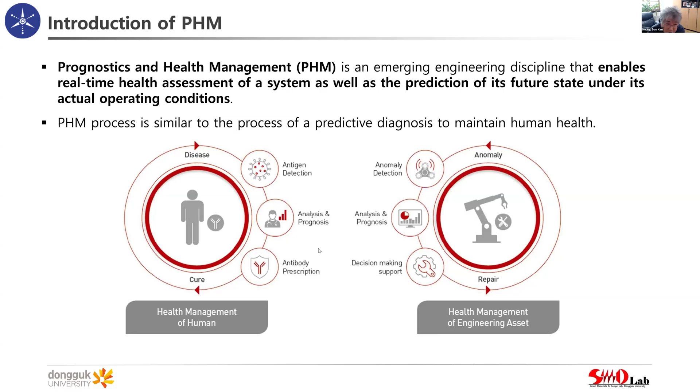As we move to the Industry 4.0 era, where machines operate autonomously and deliver services, we need to ask who will take care of these machines. That's where PHM comes in. We are experiencing a paradigm shift in operation and maintenance. From the old strategy, fail and fix, to the new approach, predict and prevent. Instead of waiting for breakdowns to happen, PHM allows us to stay one step ahead.

Over the years, maintenance strategies have gone through a major transformation. In the past, maintenance was mainly reactive. We waited for something to break down before fixing it. But now we are moving toward proactive and predictive approaches, thanks to technology like PHM.

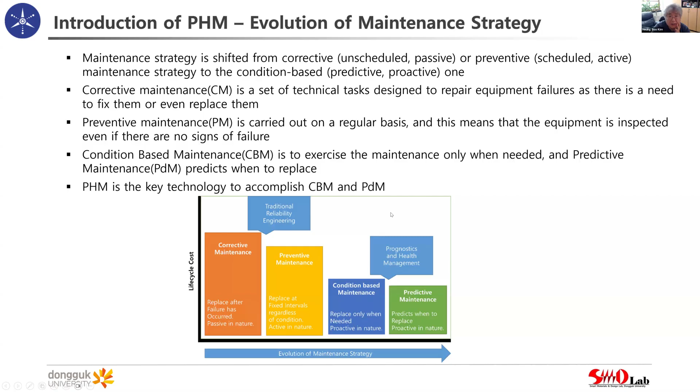To reduce maintenance costs while keeping reliability and safety, condition-based maintenance is a more popular approach. But to make CBM truly effective, we need prognostics, the ability to predict how and when failure will happen. If we can predict crack growth or degradation in advance, we can schedule the right maintenance at the right time.

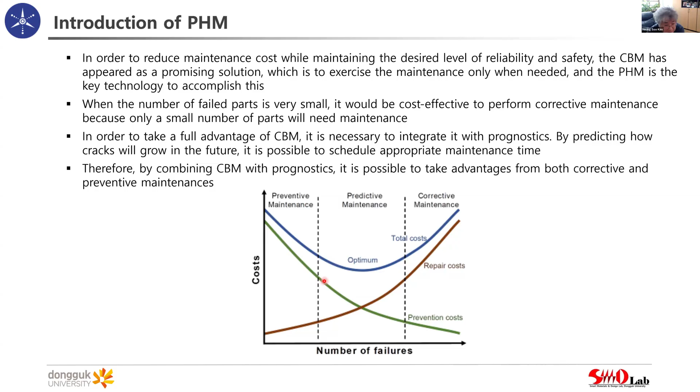Based on domain knowledge, there can be some threshold, and if the degradation level passes that specific threshold, it means end of life. The prediction of this end of life is usually based on statistics. Given the current stage of life and degradation level, if we can predict the end of life, then we can predict the remaining useful life based on probabilities. RUL prediction allows us smart decisions and fewer surprises.

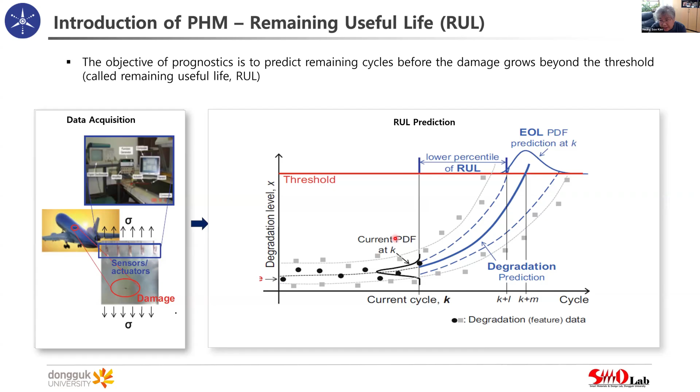One representative example of PHM applications is the F-35 fighter jet, which introduced the first concept of PHM. In the onboard systems, there are different types of systems: propulsion, structures, or mission systems. All of this sensor data is collected in the air vehicle PHM, and it goes to the health management reporting system, which can show the current health status of this fighter jet.

During the flight or after landing, all data are gathered in the central autonomic logistics system for PHM, and it provides troubleshooting of the fighter jet, as well as information for predictive maintenance and maintenance decision support. This enables fast, data-driven maintenance even before the jet lands. The F-35 shows how PHM can make a high-performance system smarter, safer, and more efficient.

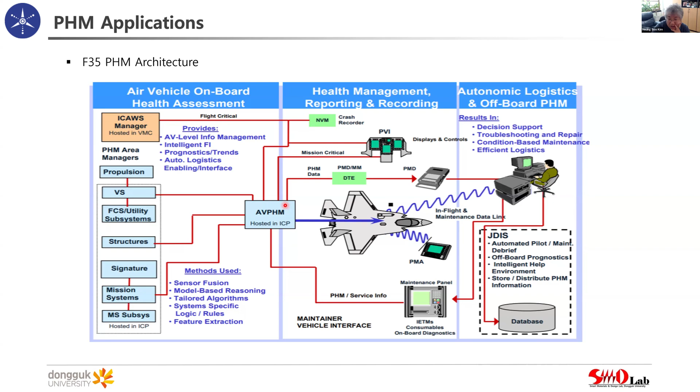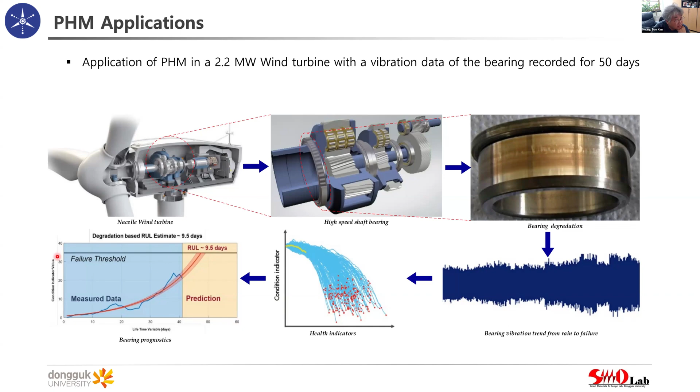Another application of PHM is this 2.2 megawatt wind turbine system. Vibration data can be collected from the wind turbine, and a health indicator can be developed by machine learning. Then the algorithm can provide the RUL. In this example case, the system can provide the RUL 10 days before the failure.

Another PHM application is this kind of turbofan engine. Four different engine cases were monitored here, fault indicators show the degradation trend, and the RUL was predicted for each case. This helps schedule maintenance before engine failure. The engine is a critical component of modern commercial aircraft, so PHM technologies are now inserted in turbine engine monitoring.

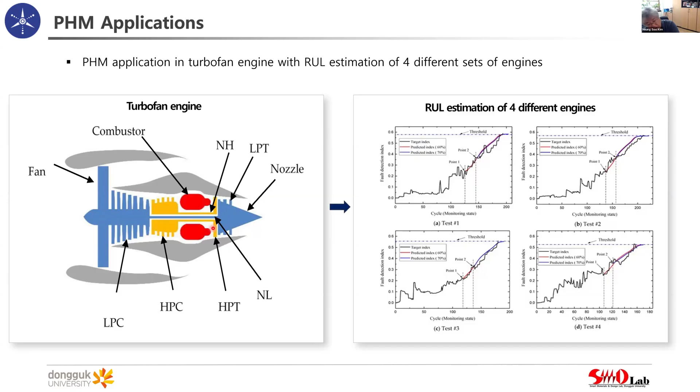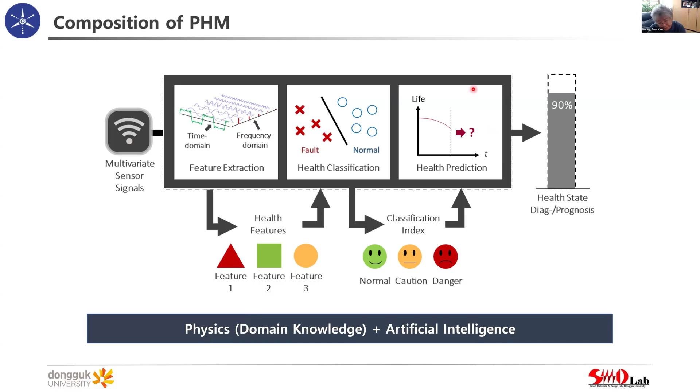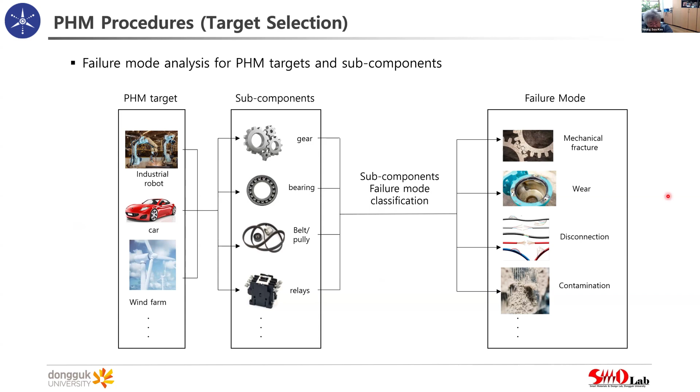This slide explains the target selection step by showing the full failure chain from system to failure mode. For example, for a car, there can be different subcomponents like gear, bearing, and so on. This bearing failure might involve mechanical fracture. The cause of failure might be overloading, and the result can be machine breakdown, quality degradation, or even worker injury.

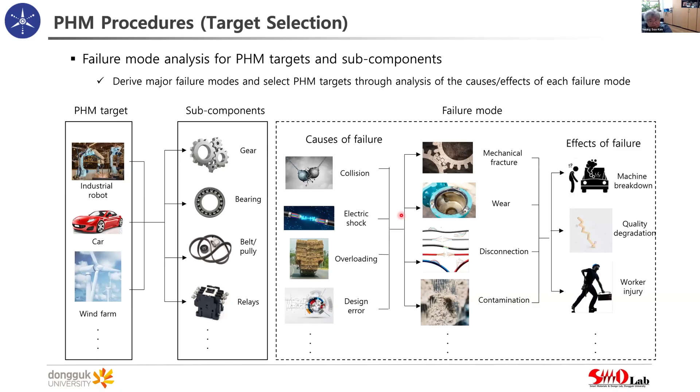Once you decide your targets, the second step is to decide how you can get the sensor data.

So next, which sensor do you need to use to detect the system? For example, for mechanical fracture or contamination, maybe we can use thermocouples, acoustic emission, or ultrasonic sensors. Each sensor has a different sampling rate, and different physical quantities.

A low sampling rate case means a small amount of data but over a long term. A high sampling rate case means a large amount of data in a short term. If you get your sensor data, you must do data pre-processing. Every sensor data has noise, so you need to denoise the sensor data. Also, you need to convert your sensor data to time domain, frequency domain, or time-frequency domain together.

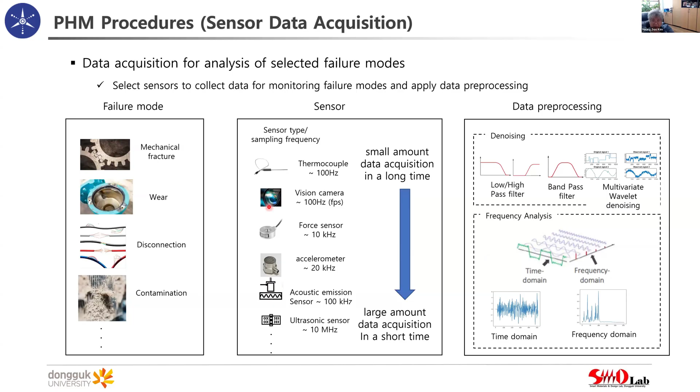Good sensor setup and clean data are critical for accurate PHM modeling.

Next one is feature extraction. Industrial sensor data often has very high resolution. For example, this kind of vibration sensor has a 6.4 kilohertz sampling rate. For 5 sensors, if you measure for 60 seconds, just one measuring case provides you almost 2 million dimensions of data points.

If the raw data is too large and noisy, then it cannot provide accurate prediction or accurate modeling for PHM. So what we need to do is feature extraction. Feature extraction usually means converting the waveform into meaningful values like RMS, kurtosis, or frequency band, something like that. After that, we need to choose what kind of feature is useful for our PHM modeling.

Also, the size of data is too big, so we need to do some dimensional reduction, which simplifies data without losing critical information. These steps boost learning speed and improve PHM model accuracy. If you have good features, then you will get better predictions with less computation.

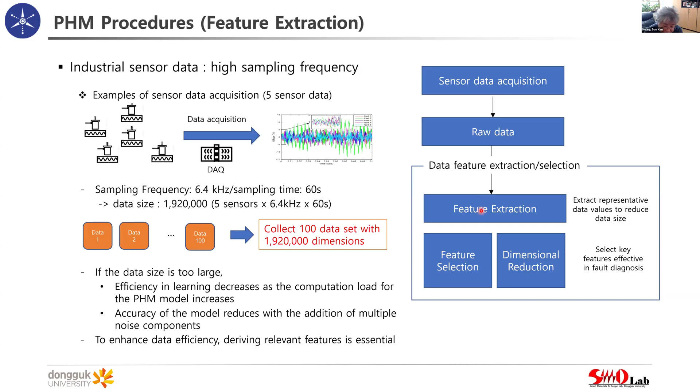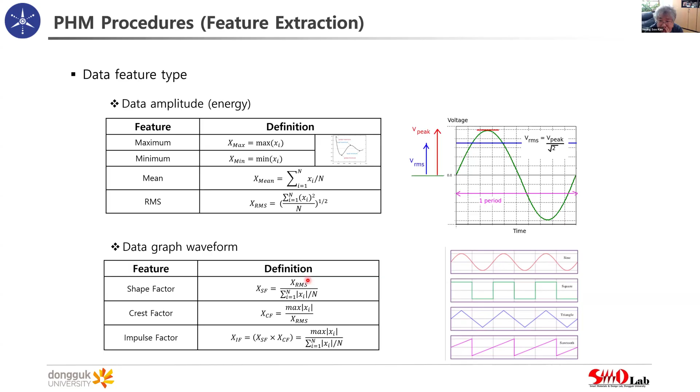This is a common data type: energy-based or waveform. For the energy-based case, usually maximum, minimum, mean value, RMS, something like that. For example, RMS provides you the average energy over time. For waveform, shape factor, crest factor, impulse factor provide you the shape of the data. Choosing the right feature type is critical for distinguishing healthy and faulty stages accurately.

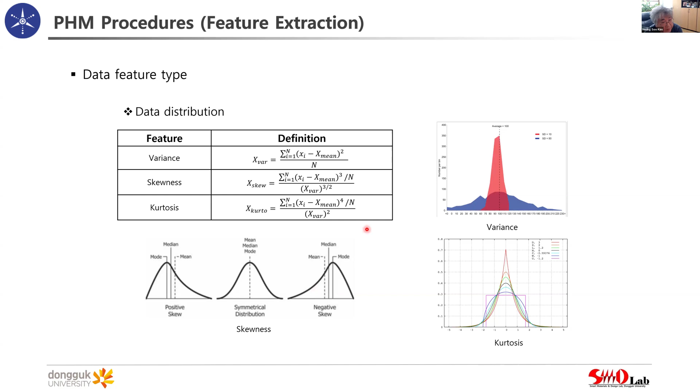If you reduce the redundancy, then you can improve the learning efficiency and model performance. So in PHM, less can be more, if you reduce dimensions wisely.

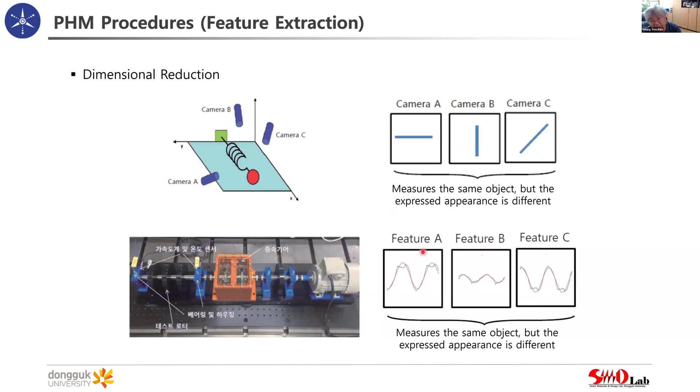The most common dimensional reduction method is principal component analysis, called PCA. PCA finds a new axis based on the distribution of sensor data. This new axis is called the principal component, so it's called principal component analysis.

It transforms the data from the original axes—here maybe A, B, C—to the principal components ranked by importance. In this example, I have A, B, C, three features, but if I use the first principal component, then I can use just that first principal component data only. PCA reduces noise, compresses data, and helps improve the model performance in PHM.

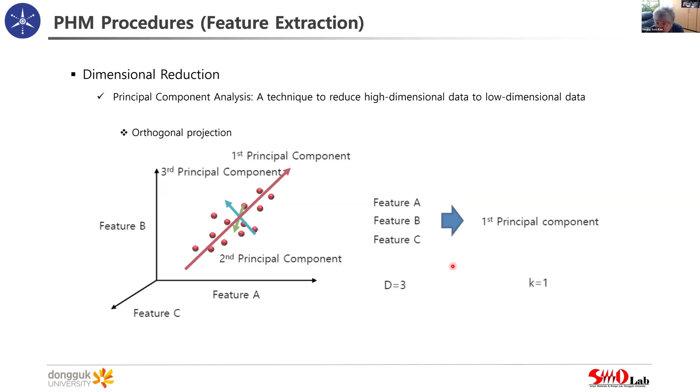PCA not only reduces dimensions, it also helps the visualization of data, compression, and anomaly detection.

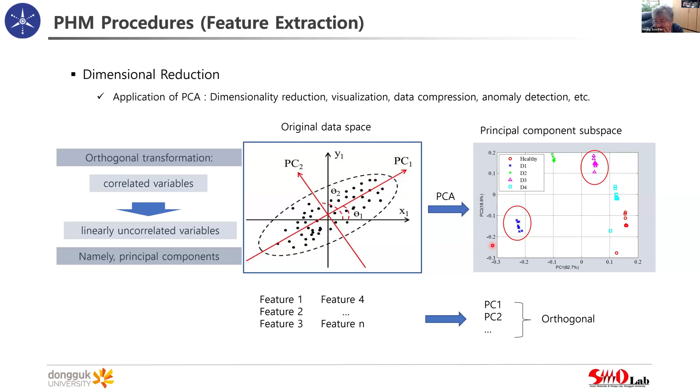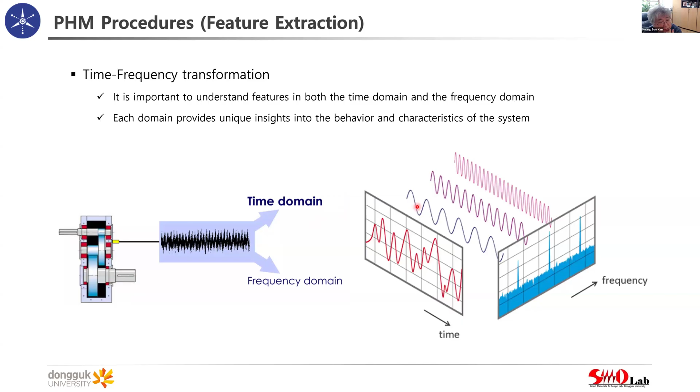Next key feature extraction methodology: time-frequency transformation. Usually the sensor data is time domain data, but the time domain data is not enough to provide us information about damage. If you can convert it to the frequency domain, sometimes it's helpful, or if you use time and frequency domain simultaneously, sometimes it's better. So we need to transform this kind of data to frequency domain or time-frequency domain.

The most common popular method to convert time domain data to frequency domain is short-time fast Fourier transform, STFT. If you have time domain data, you make small windows, and if you do Fourier transform, then you get time and frequency domain simultaneously.

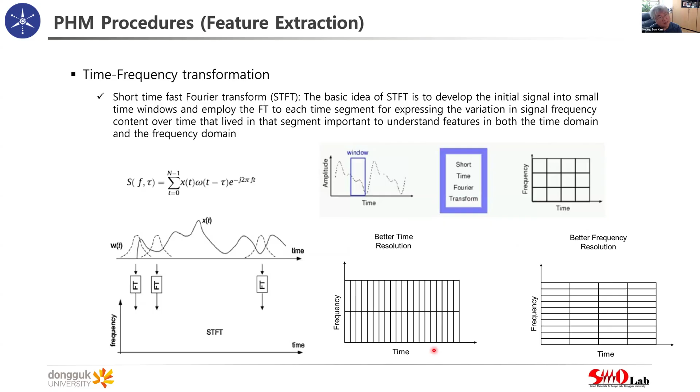It's called short time Fourier transform, fast Fourier transform. This is an example of STFT, time domain data converting to frequency domain by Fourier transform, or you make small windows and also make time domain and frequency domain together simultaneously.

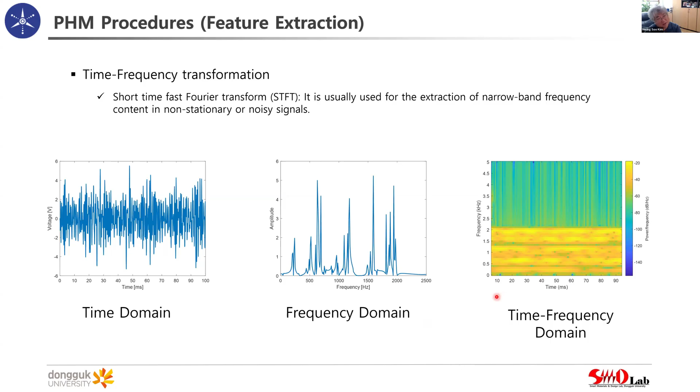Another way to present the time frequency domain is called continuous wavelet analysis, CWT. CWT provides different windows. For high frequency data you can use a small window, and for long-term low frequency data you can use a big window. So with CWT you can use flexible window sizes, giving more fine-grained insight for complex signal behavior.

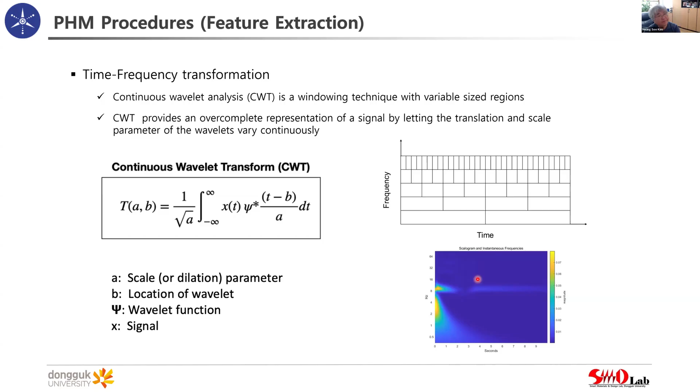So finally, AI-based PHM modeling. For PHM modeling, we need to use AI. So let's briefly see what AI and machine learning are. Most of you know this already, so just a brief summary.

AI, artificial intelligence, is the broadest term. It's a system that acts like an intelligent agent. Inside AI there is a subdomain called machine learning, which is a system that learns from data to make decisions. Inside machine learning there is deep learning, a further subset that usually uses a neural network to automatically learn features from raw data.

In PHM, the difference between machine learning and deep learning is that machine learning requires manual feature extraction, but deep learning does not. The deep learning algorithm itself does the feature extraction and classification. Deep learning takes much longer than machine learning, but thanks to modern GPUs, deep learning has become practical and powerful for real PHM systems.

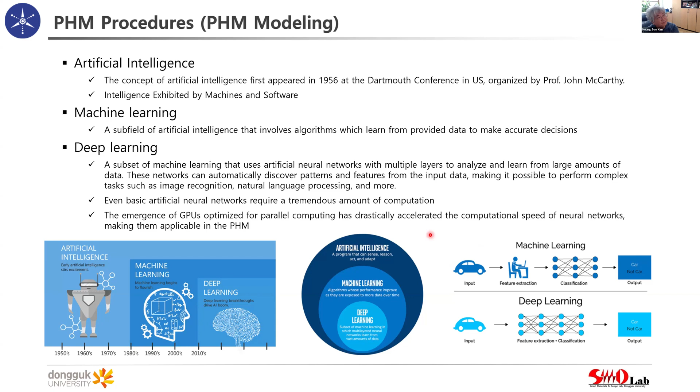Another common and simple machine learning algorithm is KNN. KNN is a very simple method: it checks which data point is closest to a new one, and if that closest point is faulty, the new point is also said to be faulty. To determine closeness, KNN uses distance — there are maybe three different types of distance measurement: Euclidean, Manhattan, or Minkowski. KNN is very easy and works well for basic classification in PHM.

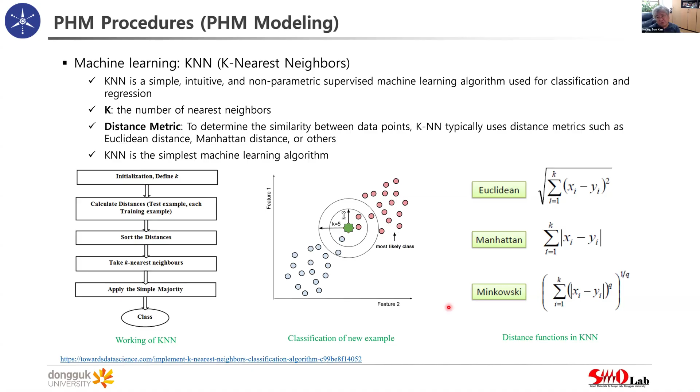Another popular method for PHM modeling is CNN. CNN is a deep learning method — it automatically finds important features with no need for manual extraction. It has convolution layers and pooling layers repeated, followed by fully connected and softmax layers. A convolution layer detects patterns in the image, and the pooling layer makes it faster by making it smaller. The fully connected layer leads to the final decision. In PHM, CNN can be used for image-based diagnosis or vibration spectrograms, and since CNN learns features by itself, it saves a lot of work.

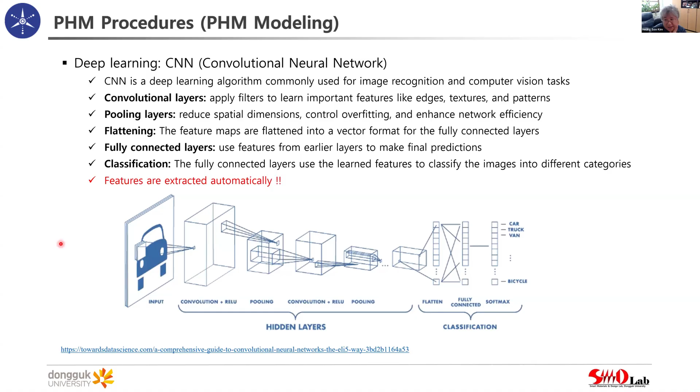Another deep learning method is the autoencoder, which is usually used for denoising, anomaly detection, dimensional reduction, and so on.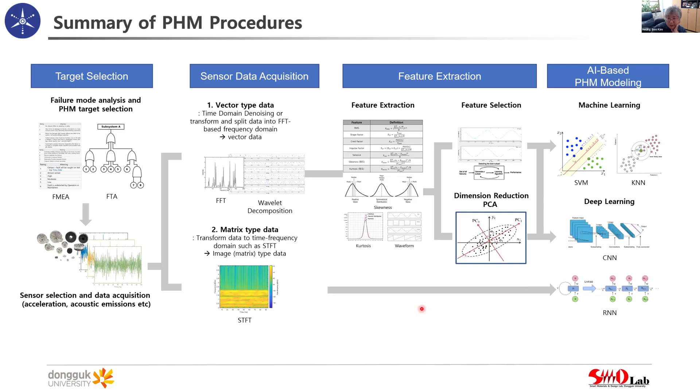The summary of the full PHM process goes from target selection to AI-based PHM modeling. Target selection is choosing the system and failure mode. Sensing and data acquisition collects time- or frequency-based data. Feature extraction extracts useful patterns and reduces time domain data. PHM modeling uses machine learning or deep learning to predict faults. Each step is important to build a smarter and more reliable PHM system.

So this is a brief introduction to the PHM procedure. Now let's move on to the next part, PHM for composite structures. We will look at how health monitoring techniques are applied specifically to composite materials.

Laminated composites are made by combining fibers and resins. This gives them high strength and flexibility in design, and they are used in many fields. This is the Boeing 787, a very famous figure, and more than 50% of this aircraft's structure is now made from composites. Ships, cars, and other structures also use composites. Each layer of a laminated composite can be tailored to meet specific mechanical needs, like bending strength, impact resistance, and so on.

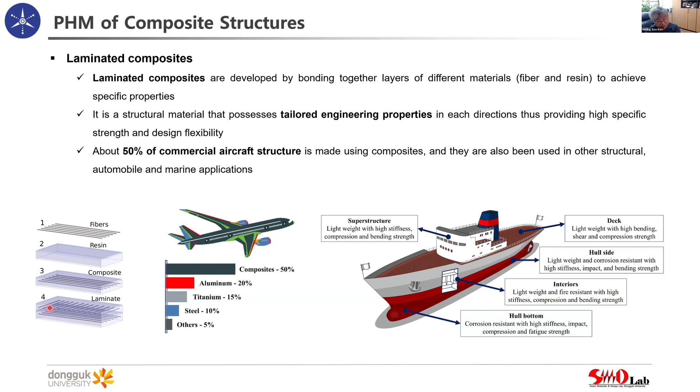This laminated composite has orthotropic characteristics. Because of this, its failure mode is very complicated. The most common failure modes are fiber breakage, matrix crack, or delamination. Among these, delamination is the most critical. It weakens the structure and may lead to catastrophic failure. To extend the life of a composite structure, it's important to detect this kind of delamination at an early stage.

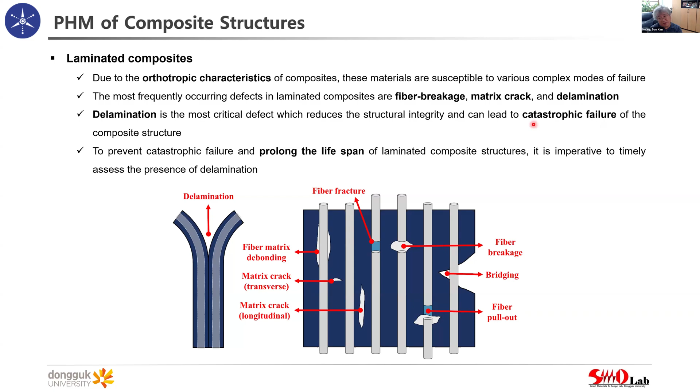To detect the damage of a composite structure, there are two main approaches. The first one is the physics-based approach, and the second one is the data-driven approach. The physics-based approach uses formulas and material models like constitutive equations or fracture mechanics. It explains why the damage happens.

Data-driven approaches use sensor data and machine learning or deep learning to detect patterns and predict failures. It works well with vibration or acoustic signals. We often combine both to get accurate and reliable health monitoring.

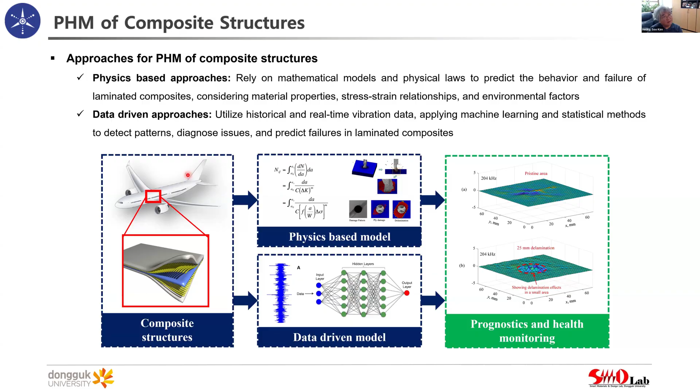Okay. This is what I did during my PhD work. I analyzed how delamination affects the vibration behavior of composite plates. Experimentally, I measured the vibration modes of the composites and also developed a numerical model to describe the vibration effect of the composite structures. This was published around 2003, my PhD work. Based on these models, I developed the modal strain damage index and so on.

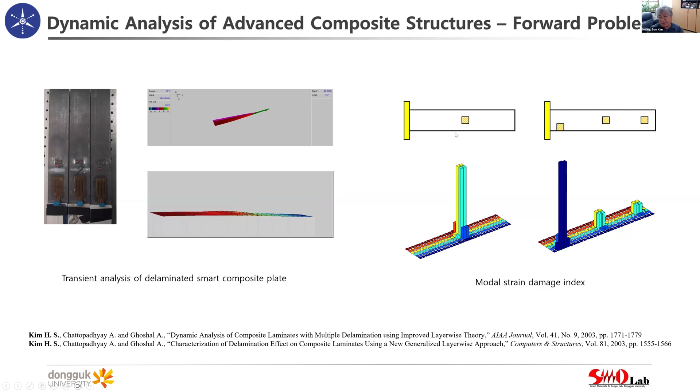This is a forward problem, meaning I know where the damage is, and based on the damage, I developed a numerical model to explain the damage effect. This result can help us to solve the inverse problem, meaning detect damage from the structural response.

Around 2014, 10 years after my PhD work, I did this kind of work. Based on my numerical model, I applied random excitation to the system, got the random responses, and did some system ID to construct the system matrix, input matrix, and sensor outputs. Using the system matrix and input matrix, I made discriminative features and applied them to PCA, which I explained to you before.

And I plotted here two principal components. There are five different types of data. In time domain data, it's very hard to classify each class. But if I use this kind of discriminative features, I can separate the different classes. This was reported in Computers and Structures. This means in the time domain it's not easy to distinguish the sensor signals, but if you choose proper features, we can classify the data. That's the meaning of this work.

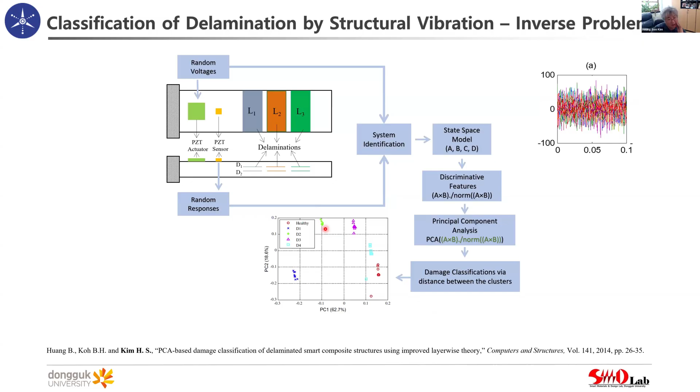After this work, in 2016, there was AlphaGo. AlphaGo defeated a champion in Go, right? After that, AI became very popular in every engineering discipline. At that time, I also studied machine learning, thinking it might be possible to apply it to my field.

So we used a support vector machine, and the support vectors can provide us the domains of different classes. We reported this in Composite Structures, the top journal of composites, right? Dr. Asif Khan did this during his PhD work.

Based on those studies, we found that structural vibration contains global structural information, right? But the damage is local structural information. So from just time domain data, it's not easy to extract local information from this kind of global information. But our previous work showed that if we choose proper discriminative features, it's possible to extract local information.

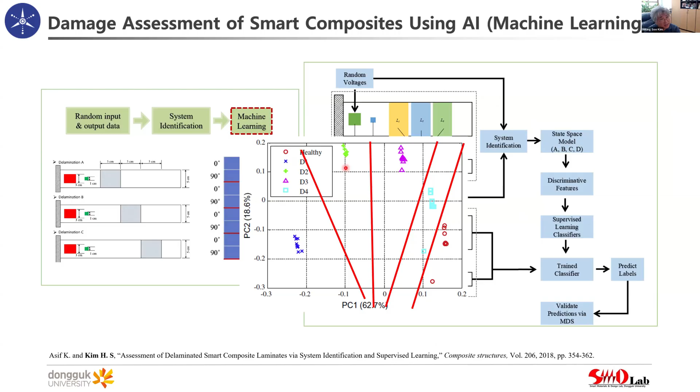But in this case, we need the input data and output data simultaneously. In real applications, it's very hard to get input data. So the question is, is it possible to classify these kinds of damage using sensor data only? The answer is yes. So we used a CNN here.

We converted the time domain data using the short-time Fourier transform into image data, a 2D array. Using this image data, we used the CNN to classify the damages. And it works. It was published in Composites Part B, a top journal, in 2019. It has been cited more than 200 times, one of the most highly cited papers in my life. Dr. Asif Khan also did this work.

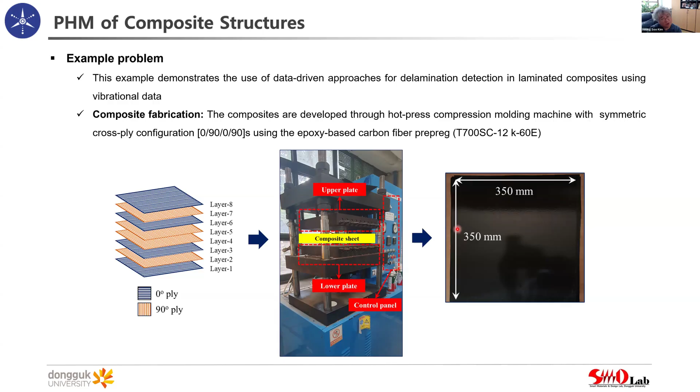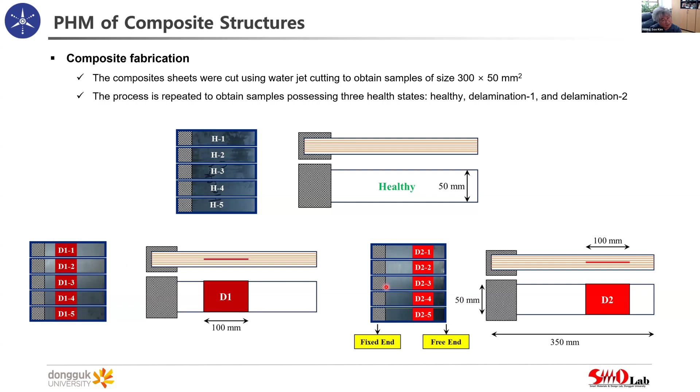After this work, I realized damage detection based on structural vibration is possible. So we tried to demonstrate this by experiments. We made composite coupons using a hot press. The composite plate was cut to 300 by 50 by water jet, we prepared five coupons for each case, and we prepared the vibration test system.

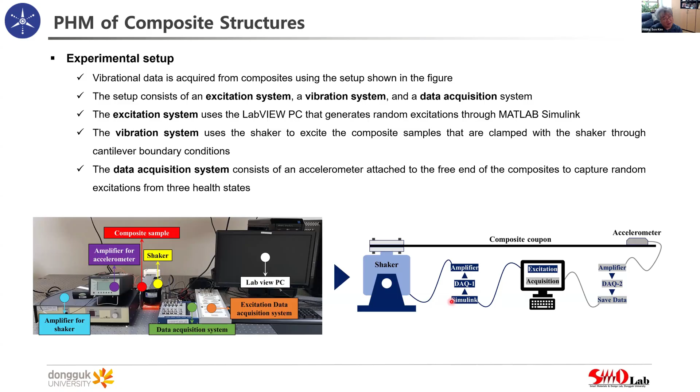It contains an excitation system, the vibration system, and the data acquisition system. For the excitation system, we use LabVIEW, which provides the random signals. The shaker provides the vibration excitation of the composite coupons, and the accelerometer gathers the data. Based on this experiment, we prepared the vibration data for the PHM modeling.

So in each case, we had 3 different health states: D1, D2, and the healthy case. For each health state, we prepared 5 samples, so overall we have 15 cases. For each case, we did 10 tests, so we had 150 signals like this.

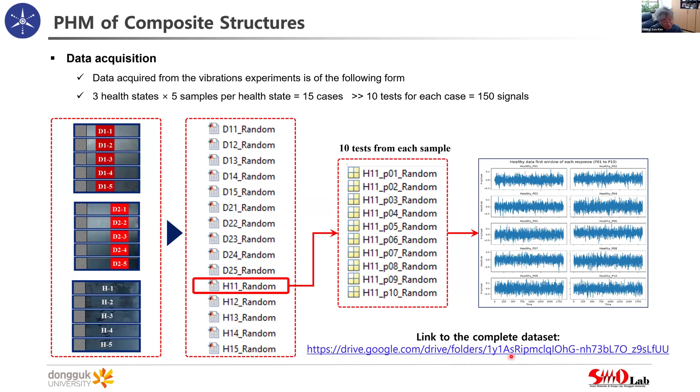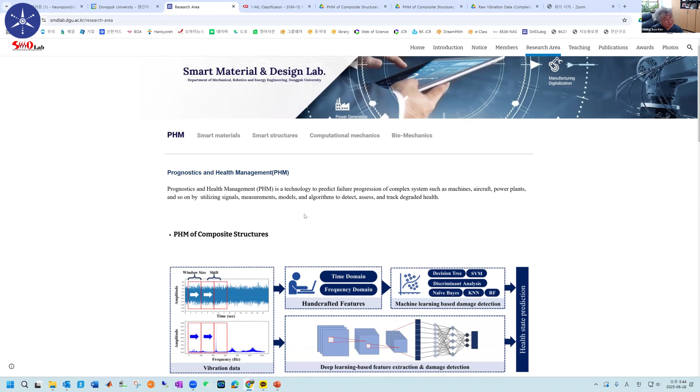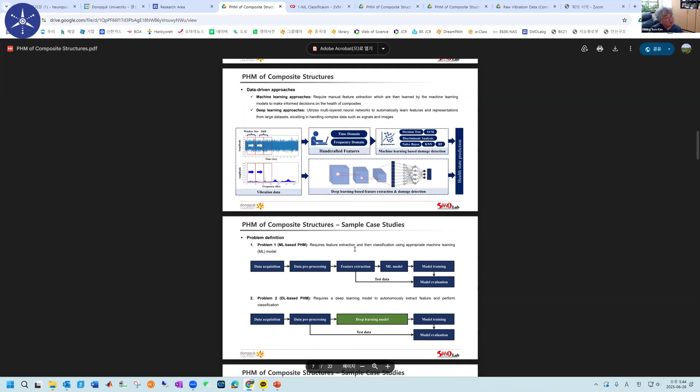The whole data set is posted on our homepage, so you can access it at this link. But maybe you cannot access this PPT, right? So I prepared this: this is our homepage, Smart Materials and Design Lab. I have several different research areas, and PHM is now my major research area. On this PHM page, I have PHM of composite structures, and I prepared the complete data set here, some training code for support vector machine and CNN, and also PPT slides explaining this code. So if you are interested, visit our homepage, and you can try to run the code.

Anyway, based on these preparations, we developed some damage assessment methods using AI. But one realistic issue is that for training, we need balanced data. That means if I have 3 different classes, healthy, D1, D2, then I must have balanced data. But in real cases, most data is the healthy case, and there is no damage data available. This kind of case is called data imbalance. Data imbalance can cause poor accuracy and poor predictive modeling. So what we need is to make balanced data, and here we used data augmentation techniques.

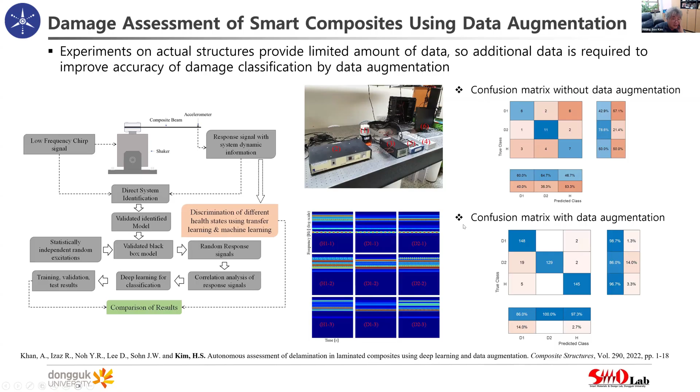Dr. Asif did this one, and he used our previous numerical model for data augmentation. Without data augmentation, the prediction accuracy is very low. With data augmentation, prediction accuracy increased a lot, which means data balance for training is very important. That's what we discovered around 2021, 2022. At this time, Dr. Khan graduated, got his PhD, and moved from our lab. Another PhD student, Muzamil, who is now a research professor in our lab, took over Dr. Khan's work, and we developed other PHM models.

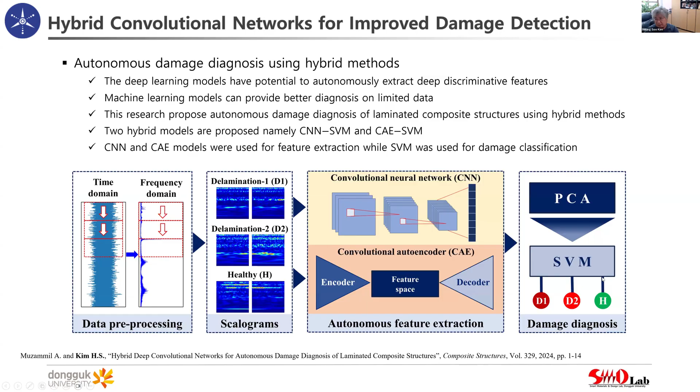We tried several methodologies. The first one is a hybrid model to improve the PHM accuracy of the prediction of composite damage. Here we developed a combination of CNN and SVM, or CAE plus SVM. CNN or CAE is used to extract the features automatically, and SVM is used for damage classification. This kind of hybrid method lets us use both the strengths of deep learning and traditional classifier algorithms.

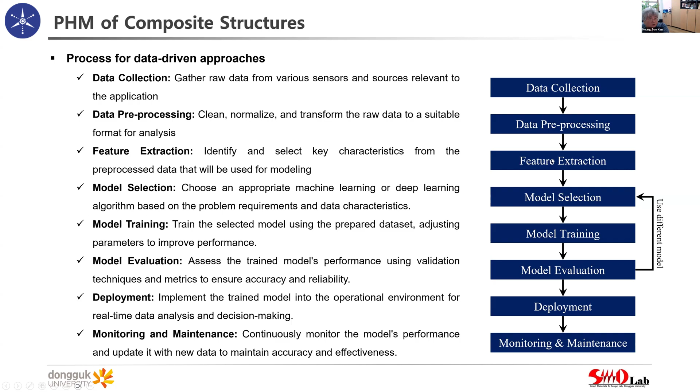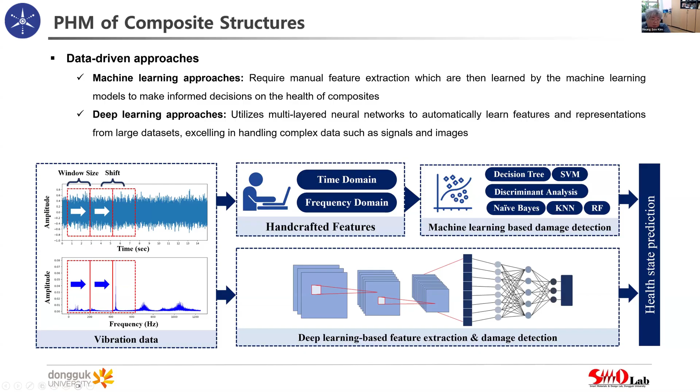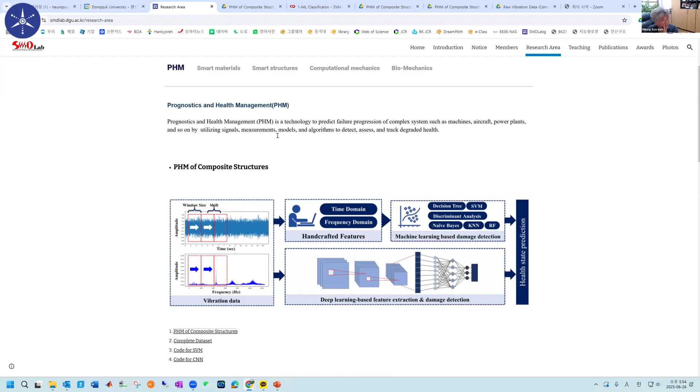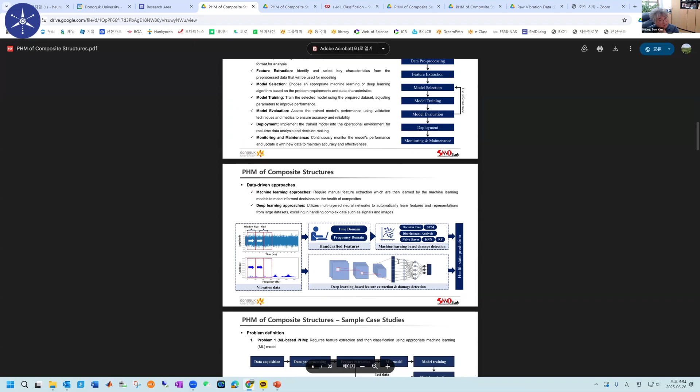So this is what I provide for you to understand the PHM of composite structures. I prepared two examples of our PHM of composite structures. The first one is a machine learning approach, and the second one is a deep learning approach. Because of the time limit, I'll just quickly show you how you can access them. As I told you, on our lab homepage you can find this page on composite structures, and you can download the slides for these two codes, and there is an explanation of the code. This is just what I showed you, right? And from here, it shows how to use the source code.

So we have this time domain data. The complete data set is provided here, right? And I provide two PHM codes here. One is a support vector machine, and the other one is a CNN. If you click here, it's not moving well, it takes time. Okay, if you click here, it's a Python code, but it can run on Google Colab. So you can see all the source code, and if you run the source code, you will figure out how the PHM of a composite structure works. Okay.

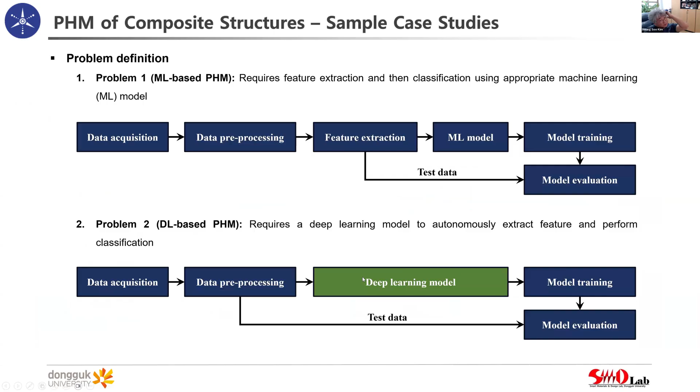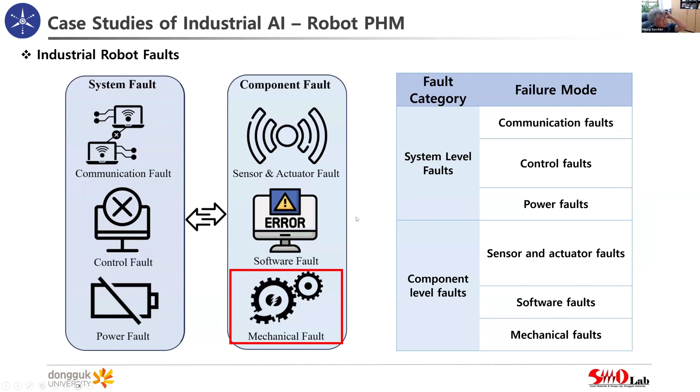Because of the time limit, I cannot explain all the things. Maybe I can move to the next. I prepared some other case studies based on industrial AI-based PHM. Our lab is also doing PHM of industrial robots, and we did a project on damage detection of the industrial robot.

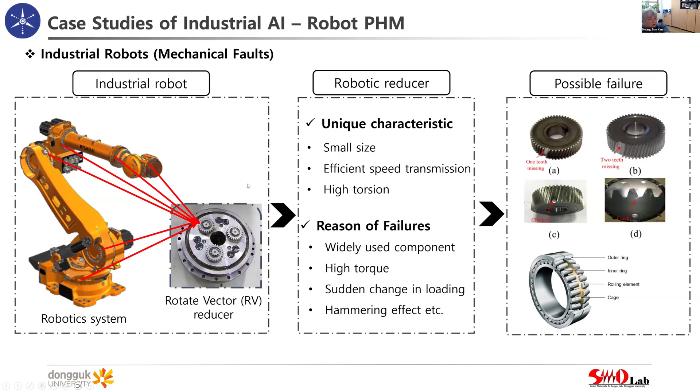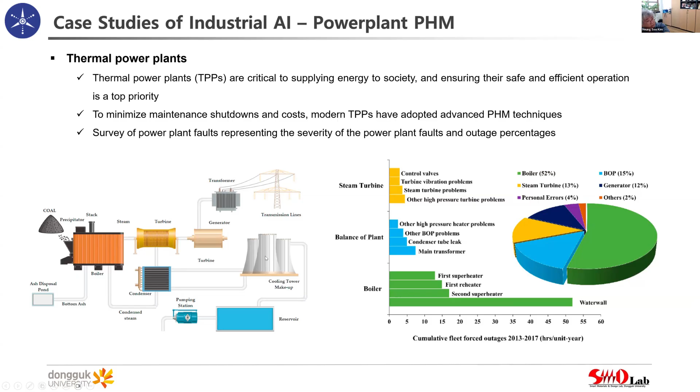And the other one is power plant PHM. We also collaborated with Korea Electronics, and we tried to detect leaks in the pipeline of this 500 megawatt power plant. I'll just omit the details, and if you are interested, maybe I can share our papers.

So because of time limit, I'll just conclude my presentation. PHM is a transformative approach enabling real-time health assessment and predictive maintenance of complex systems, particularly in composite structures and energy applications. Data-driven methodologies, including machine learning and deep learning, have demonstrated significant potential in detecting and classifying structural damage, even under data-scarce and noisy conditions.

Hybrid AI models, like CNN-SVM or CAE-SVM, and explainable AI techniques improve interpretability and performance in real-world diagnostics. Robotics, maybe we just omit. We are currently advancing our research on industrial AI applications through ongoing collaborations with Hyundai Robotics for anomaly detection, and also trying to detect the RUL for lithium-ion batteries in mobility applications.

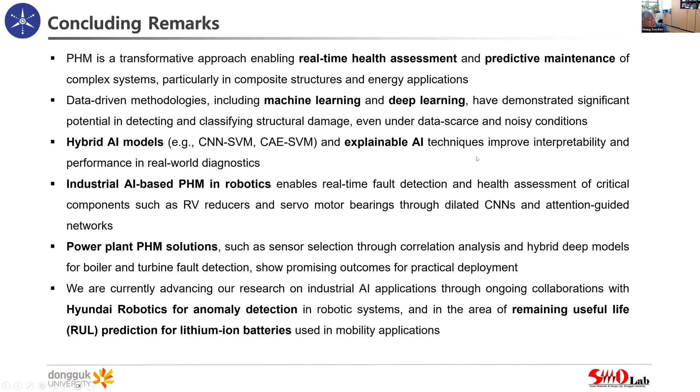Right now, for a very simple bearing, a simple mechanical component case, it's possible to predict RUL. But for this kind of composite structure, there is no paper available for RUL prediction. What we want to do is combine physics-informed neural networks and XAI to predict RUL. So this started this year, a 5-year project, and hopefully after 5 years I want to develop some methodology to predict RUL of composites.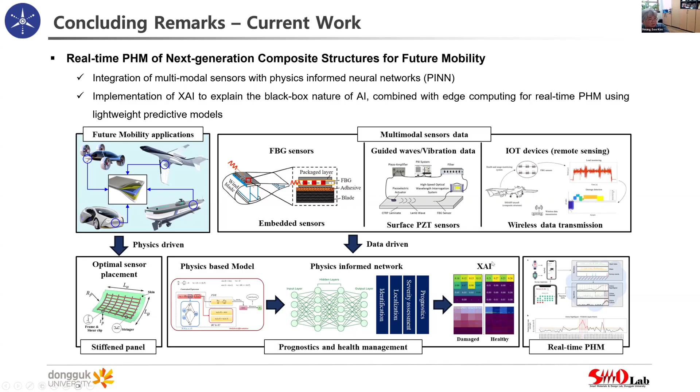The second one is the anomaly detection of robots. And the third one is RUL prediction of mobility batteries. The battery case is much easier than composite structures to predict RUL. So this is what we are now trying to do, predict RUL of batteries.

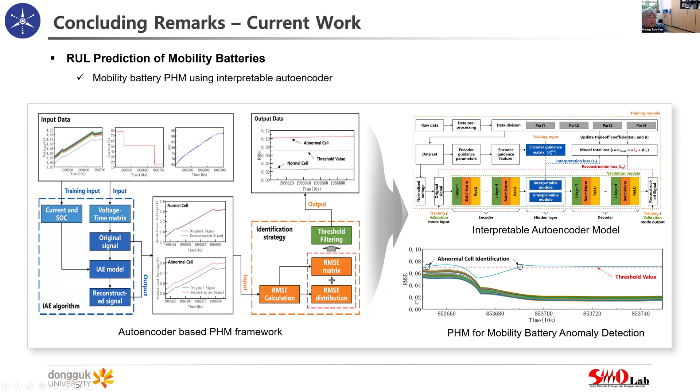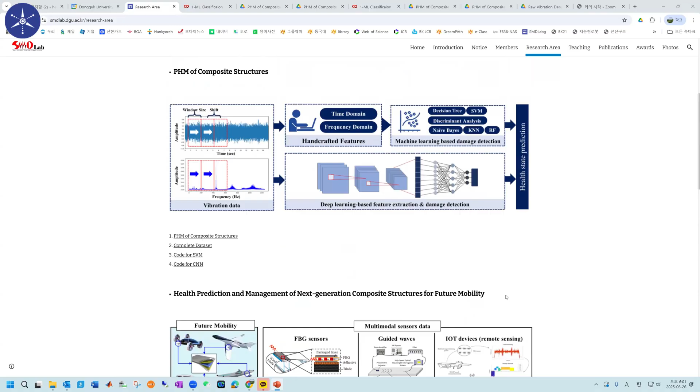So I'm just wondering, is it possible for the well-trained model to be applied for detecting delamination in more complex structures, or is this model only applicable for a specific case, for example, the same structure as the one you are using for generating the data set?

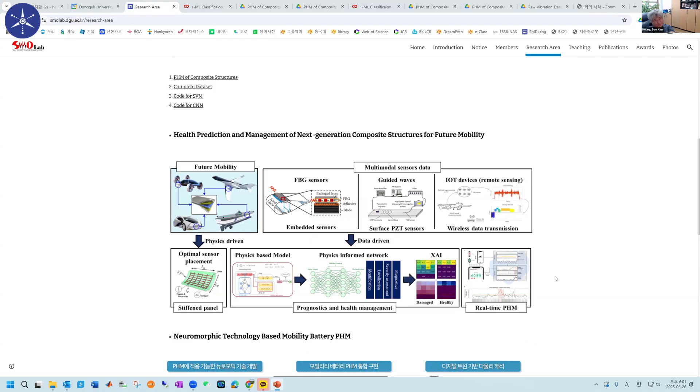Thank you very much. That's a very nice question and a critical question, right? The thing is, a machine learning or deep learning model's accuracy or performance is based on the data set, as you know, right? So our previous work is basic research paperwork. The importance of that work is, as I told you, from the global structural response we can extract local information, damage information. That's what we found and reported to the world, right?

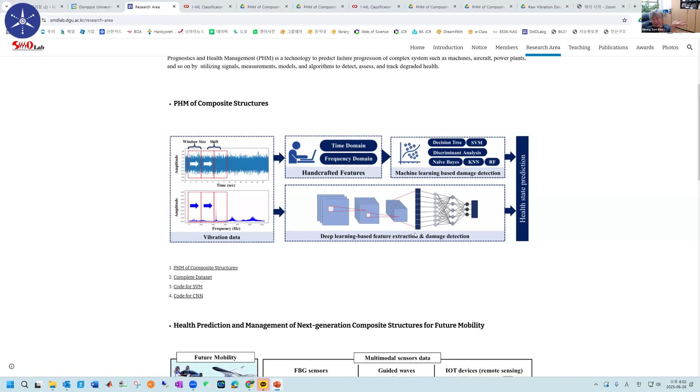Using papers. And those are only applicable for very simple structures now, because I have only the data for the cantilever structure. So that's the reason I want to provide other things, a physics model, something like that. If we have more data for complicated structures, of course, I think right now the power of AI is good enough. So if we have enough information, definitely we can detect damage in complicated structures. But the issue is we don't have that kind of data yet.

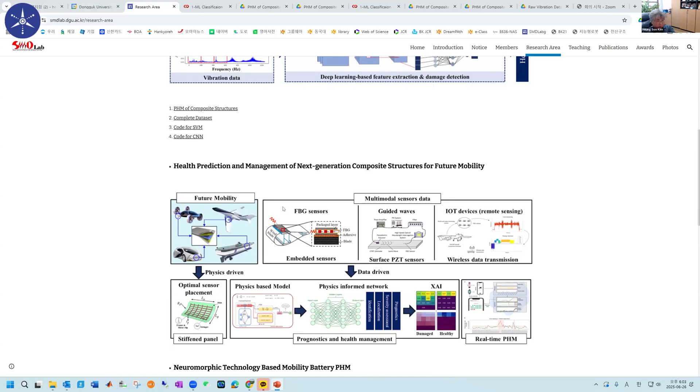So if you have a good data set for AI training, based on my experience, I can say I had several experiences, not only for damage detection in composite structures, but for lithium-ion batteries and some robot systems.

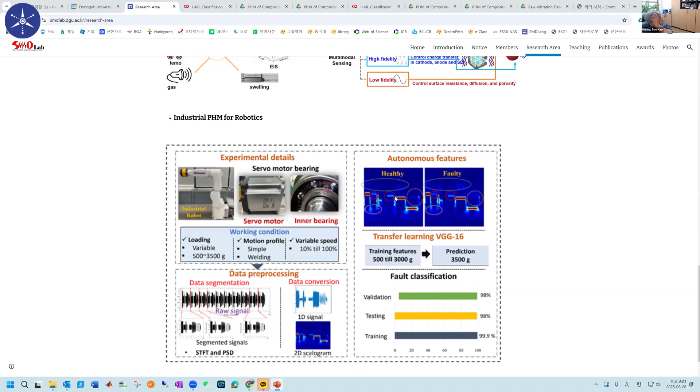If we have enough data, then definitely the AI model can detect the damage information. So the issue here is, do you have enough good data or not? That's the issue. If you have good data for a complicated structure, definitely you can develop a good model and you can predict damages. But if you do not have good data, it's not possible.

Okay, yeah, that's fair enough. Thank you, Professor Kim. Really nice talk. Thank you.

So another good thing is, that's the reason this field needs people like us, right? Engineers, because this problem is an inverse problem, right? Figuring out the damages from the sensor outputs is really not easy. I didn't present it today; today's presentation just has the classification of damage only.

But recently what I'm doing with my student is localization of damage. Using the sensor outputs, we want to figure out where the damage is located. That's usually what structural health monitoring people did, right? But in previous structural health monitoring cases, localization of damage was possible only for a very narrow zone, and we want to detect damage in a very large structure, like this aircraft wing.

It's a very big one. In a small area, it's possible to localize damage using Lamb waves, guided waves, something like that. But it's not applicable to a big structure. So that's the question, and we want to try to develop some methodologies to localize damage. That's another level of problem.

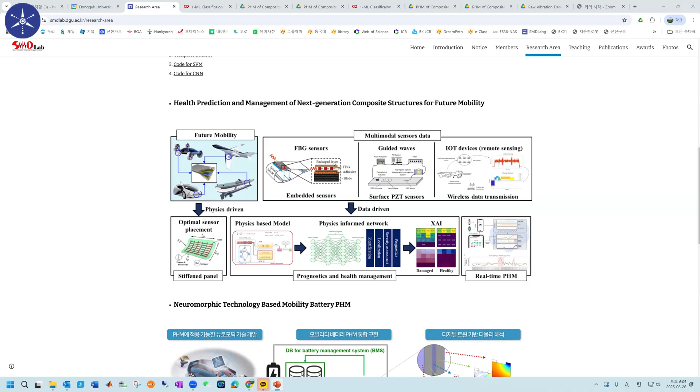So firstly, we want to classify if there's damage or not, then we'll definitely move forward to get a more accurate prediction for the severity and location of the damage, and more importantly, for much larger or complex structures. It will be more challenging, but I agree with Professor that there's still a long way to go for this.

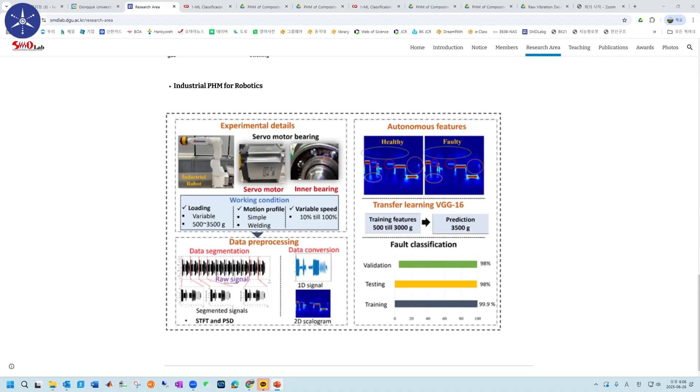Thank you. One thing is, I heard from Asif that now you want to study damage detection of a composite pipeline, something like that. This is one example of my work: I collaborate with Hyundai Robotics. They make many types of robots, and their robots are in Hyundai automobile smart factories. There are 100 robots inside the smart factories, and if one of the robots stops, then the overall process just stops, and a huge downtime cost occurs.

So now they want to develop a PHM model like what we are talking about, right? But even this big company doesn't have a PHM algorithm itself. The key of PHM is predicting RUL, but that's the last stage. Hyundai Robotics wants to develop an anomaly detection methodology now. In the overall procedure, the first step is anomaly detection. After that, diagnosis of the system: where is the fault? After that, maybe we can predict the remaining useful life. So this major company still cannot develop the anomaly detection methodology.

I showed you the example of PHM, right? Turbofan engine. The gas turbine engine is a very important component in aircraft, and GE or Pratt and Whitney, the gas turbine engine makers, developed PHM technology and apply it to gas turbine engines only. Commercial airlines are just using the PHM solutions provided by the maker, GE or something. But GE asks too high a cost; it's too expensive. So the commercial airlines want to develop their own PHM algorithms. That's what we are doing now. And right now, there are lots of demands from industries for this kind of PHM methodology.

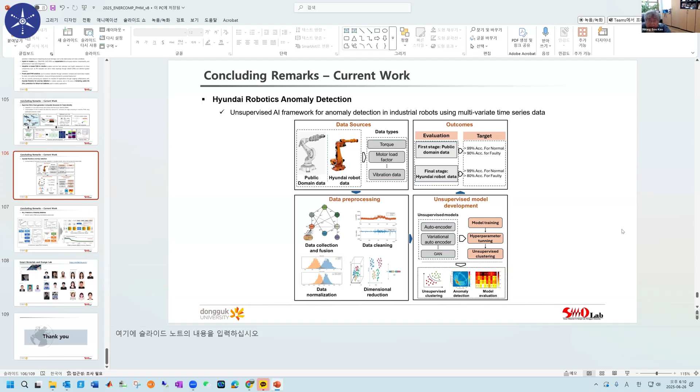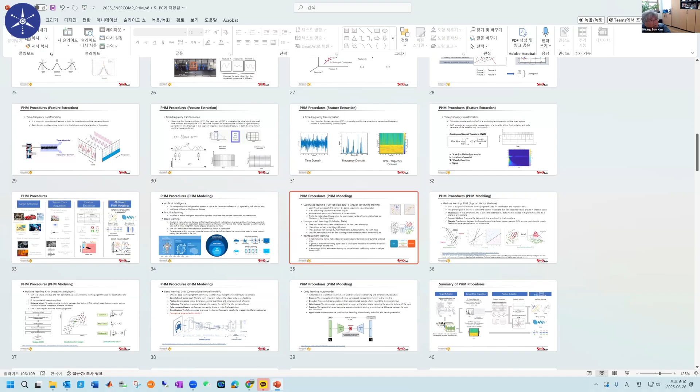Maybe you must have labeled data. That's what you asked, right? For the prediction modeling, you need good data. Good data means labeled data. For the PHM methodologies, AI, what is it? Anyway, there are three different types of AI here: supervised learning, unsupervised learning, reinforcement learning, right?

So reinforcement learning or unsupervised learning is the best because they don't need high quality data. They don't need labeled data, but the issue is the actual PHM model. Until now, we still need to use supervised learning. For supervised learning, we need fully labeled data, which for real applications means you should get a good quality of labeled data.

But the issue is, as I told you, there is always data imbalance. Most of the data you gather is healthy data, no damage inside. There can be some damaged data, but its number is much smaller than the healthy data. Then how can you balance the data? For that you might need some techniques, maybe data augmentation using AI or a physical model, or transfer learning. You need to use transfer learning, something like that.

But for anomaly detection, I think your pipeline issue case, maybe that's in the beginning of the work. For anomaly detection, maybe you don't need labeled data. Just if you have normal data, the methodology is different. What kind of sensing data is the issue? That's the first issue, but that's a different story.